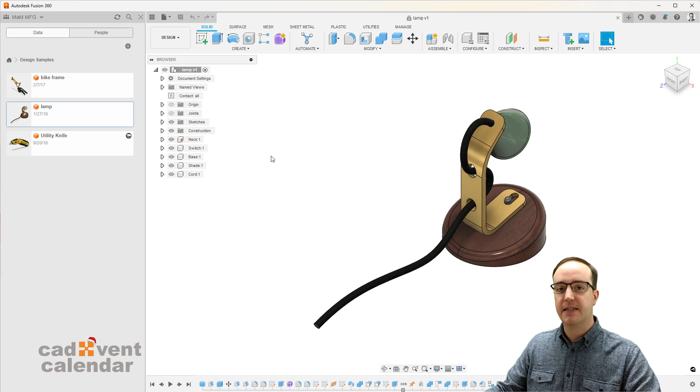As well as being used to design, simulate and manufacture your components, Fusion 360 also has a fantastic 2D drawing toolset, which again compares well against the likes of other high-end CAD systems on the market.

Once we've designed and created our component inside the modeling space, whether it's freeform, T-splines, or more traditional methods, we can change to our drawing workspace and choose to create either from a design or from an animation.

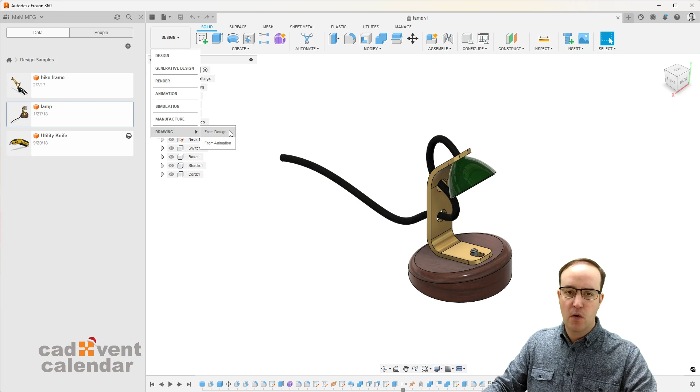For this, we're going to do from design, but it's important to note that Fusion 360 has the ability to create animations of our components, so we could create an exploded view, for example, which we can then create a drawing of.

We're going to create a drawing of our full assembly, creating a new drawing either from a template or from scratch. I'm going to choose an existing template, and then press OK.

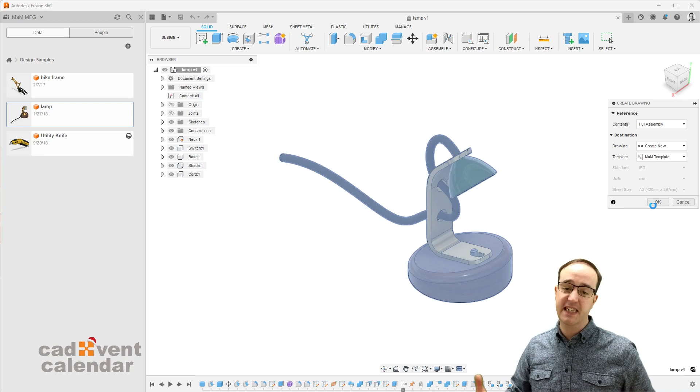Fusion 360 will go away and open the template in the background, which is DWG based, and it will allow me to place components onto that template.

The first thing it's going to do is give me a base drawing view, and using that base drawing view, I can change what orientation I want to work on for that particular drawing.

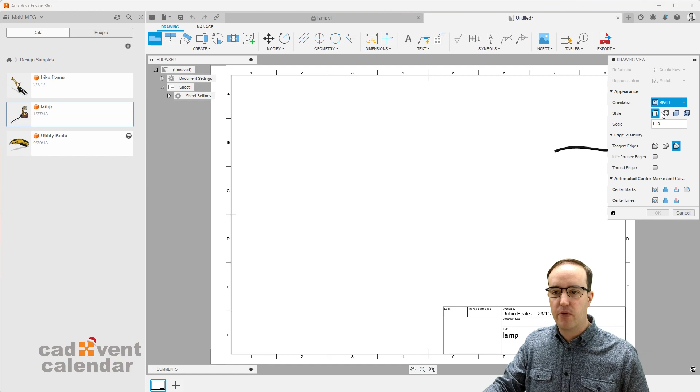So for the purpose of this, let's place a right-hand view in the middle of the screen.

We can choose our style, so I want it to be visible edges only, the scale, whether I want edges, whether I want to use center marks. I'm going to leave everything pretty much default and press OK.

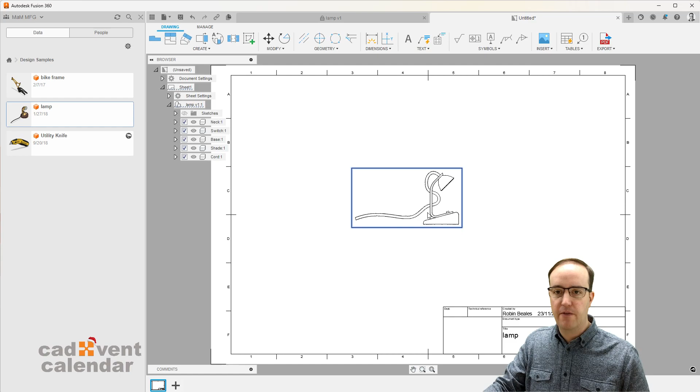And there I have my first drawing view placed. As you would expect, that view can be dragged around to be moved.

We also have the ability to turn off anything that I don't want to see on the drawing, so maybe I don't want to see the power cord as part of this.

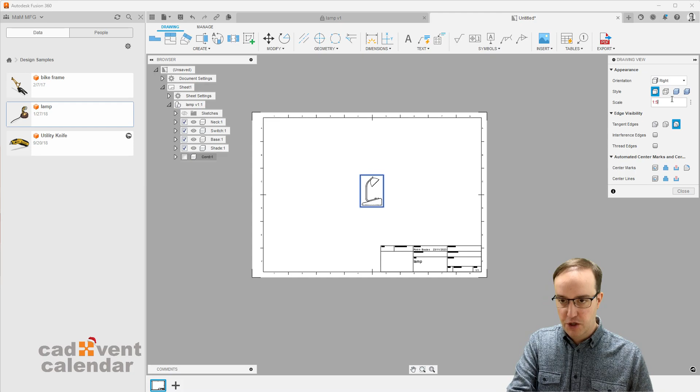I can also double click that view to get back into control the scale. So should I want this as a 1:5 drawing rather than a 1:10, I can change the scale or change the display or whatever I see fit.

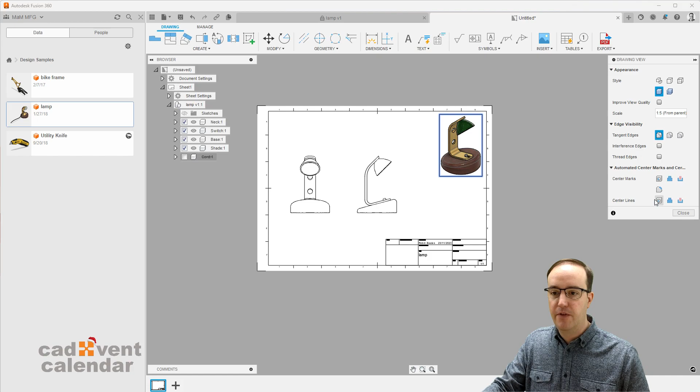Let's create a projected view to the side and an isometric view like so. Let's drag the isometric view to the top right hand side and change it so that it is a nice shaded view. Let's go to our ribbon at the top.

As you'd expect, we can place dimensions. I'm going to click the dimension tool and show you that we can very easily place dimensions on any edge or against two given points, much like you would expect, quickly and easily, to mimic the rest of the Fusion workflow.

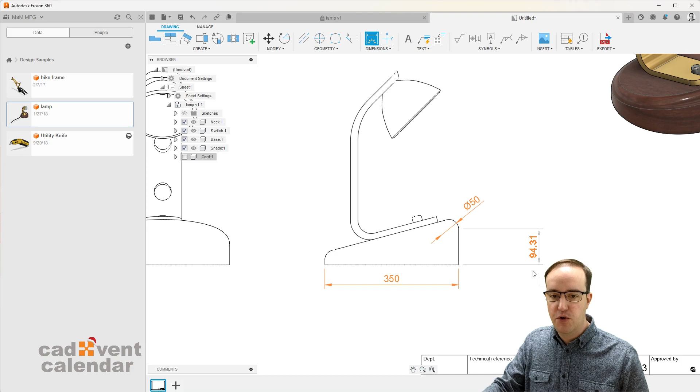Because this is an assembly, we can also start coming in and placing tables. So if this was a component with a load of holes in, we can place hole notation. If this was a sheet metal component, we could place sheet metal notation. From this perspective, it's just a simple assembly.

So I'm going to choose to place a table. From that table, you can see that we have the ability to choose a sheet metal bend table, a hole table, a revision table. I want to place a parts list.

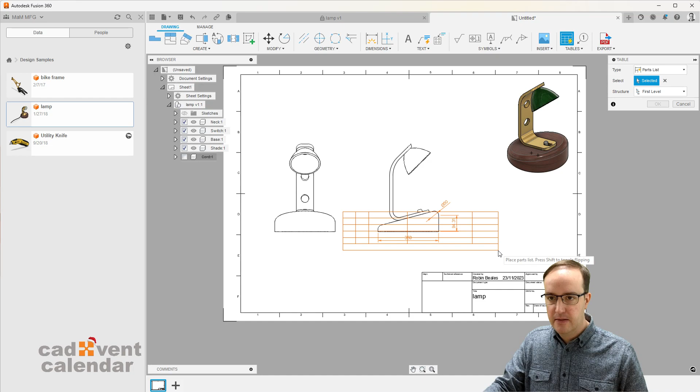It's going to select all the components for me, and I can choose the BOM structure to use for that parts list. I'm going to place it to the lower left of my title block and place that down.

You can see here that it's quickly placed those components in. I can save the drawing as well as export to PDF, DWG and DXF should you need to, as well as pushing the table out to a CSV file.

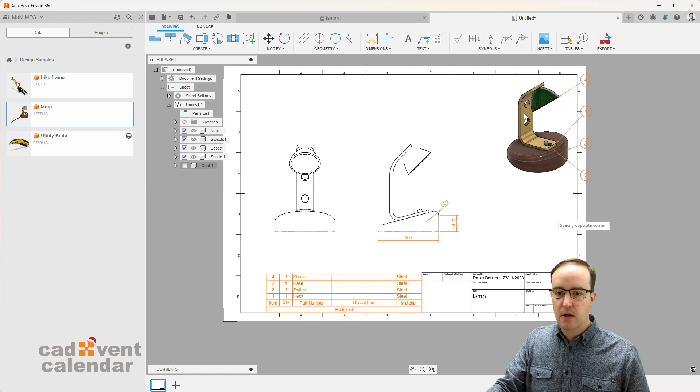Based on placing the parts list, it's also gone in and ballooned up my isometric view as well, as you would have seen inside of Fusion, doing more for you automatically.

Fusion 360, whether it's modeling, drawing, simulation or CAM, has a workspace that really helps you work with a modern and accessible application.